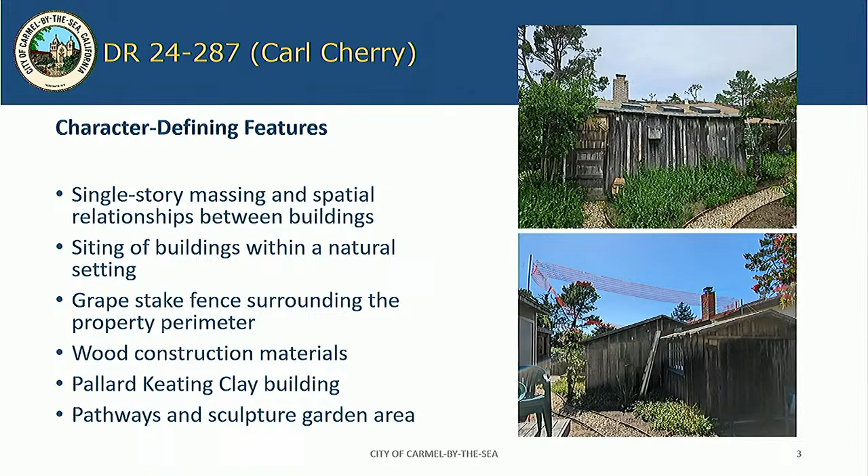The proposed project involves demolishing an existing 360 square foot studio, which is located just 1 foot from the northern property line. As I mentioned, we think this was a garage originally that was later added onto. The applicant is proposing to build a 775 square foot art studio in approximately the same location, but set 3 feet off that north property line to meet our current setbacks.

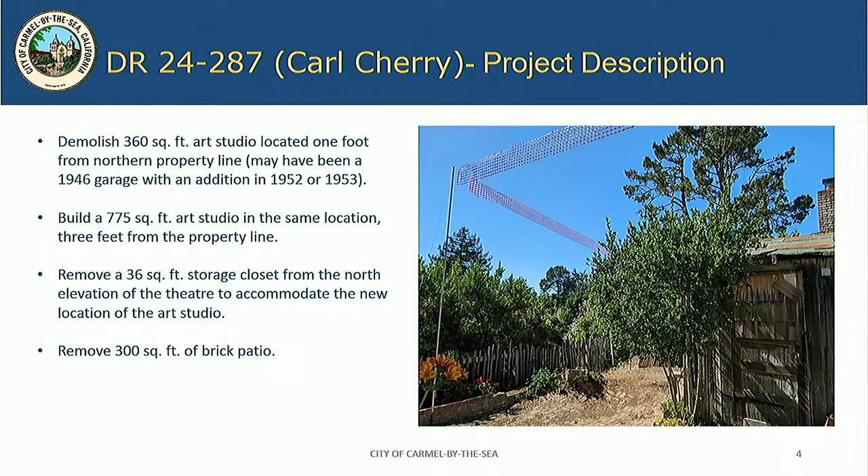In order to accommodate this new studio, the applicant will need to remove a 36 square foot storage closet from the theater building, and they're also going to need to demolish a 300 square foot brick patio. It's quite a large property, 20,000 square feet, and the applicant does have the floor area to do this project without exceeding the floor area limitations.

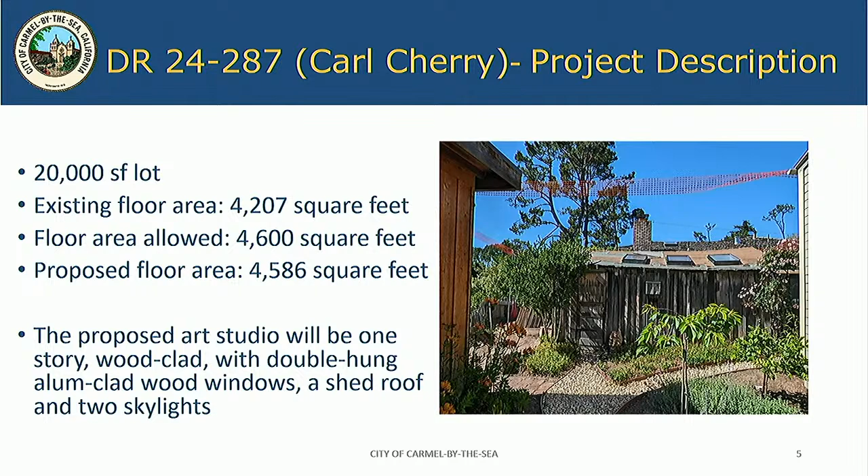They are proposing that the art studio is going to be 1 story, wood clad, with double hung aluminum clad wood windows, a shed roof, and 2 skylights. So we're here tonight to consider whether or not the project is consistent with the Secretary's standards for rehabilitation.

Here are the 10 standards listed on the left, and we did have the city's architectural historian review the project, and it is consistent as designed with no special conditions of approval with standards 1, 2, 4, 5, 9, and 10. Standards 3, 6, 7, and 8 were found not applicable.

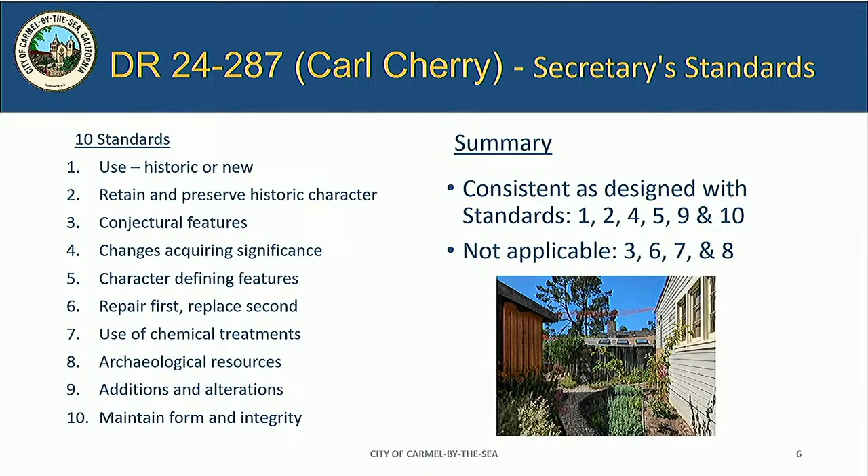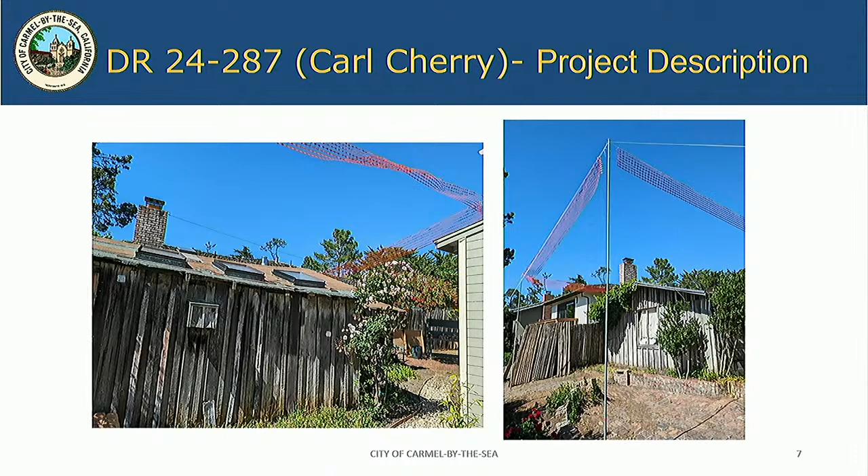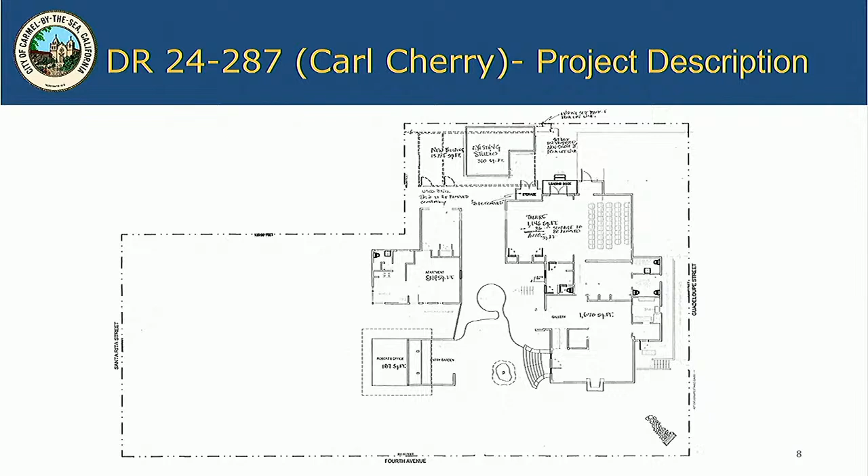Here are a few more pictures of the existing studio to be demolished and the story poles showing the outline of the new building. Here is a site plan, and I can zoom in on the project area at the north portion of the site. But here you can see the complex of buildings that have developed over the decades. Outlined in red is the existing studio proposed to be demolished, and the new building outlined in green.

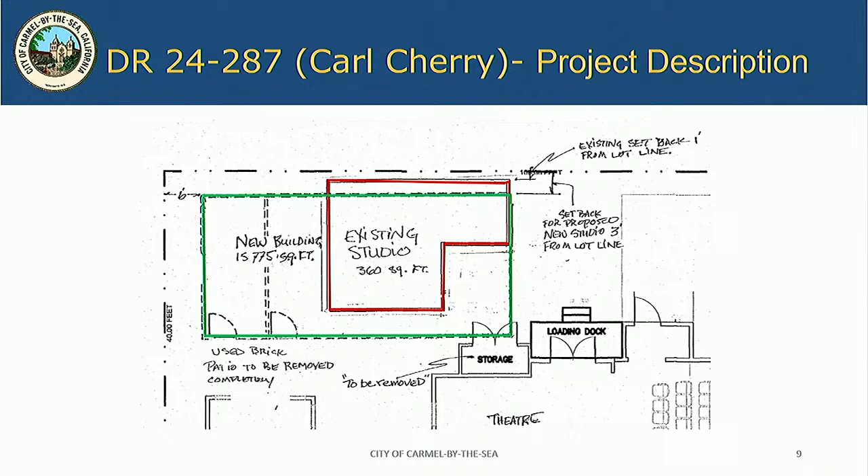Again, the new building will be 775 square feet. You can also see the storage closet on the theater, and why that area will need to be demolished to accommodate the new building.

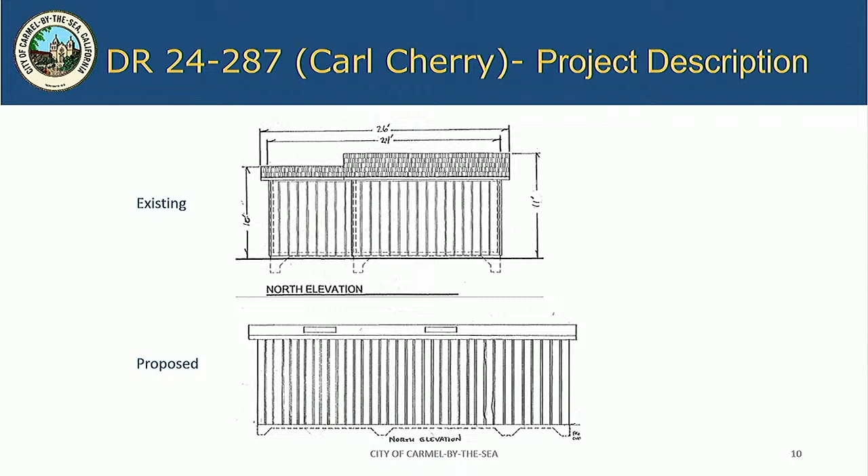I can go through the elevations. Existing is on top, proposed on the bottom. Here's the north elevation with no openings.

The shed roof will be sloped down towards the north, so you can see the 2 skylights.

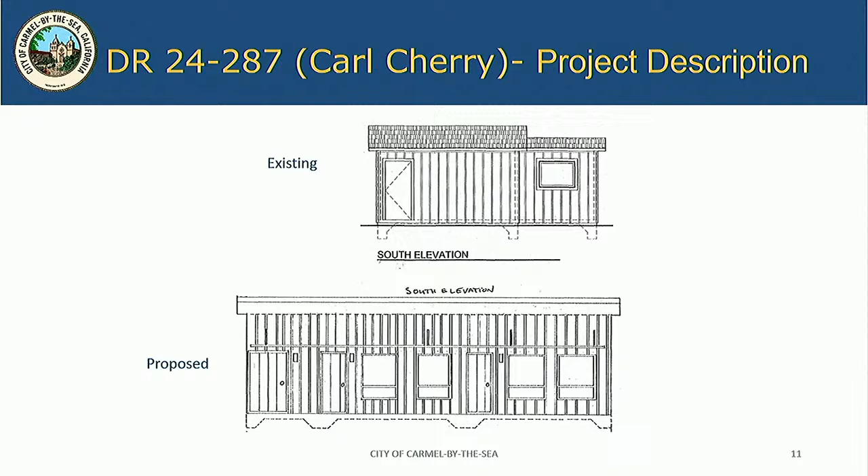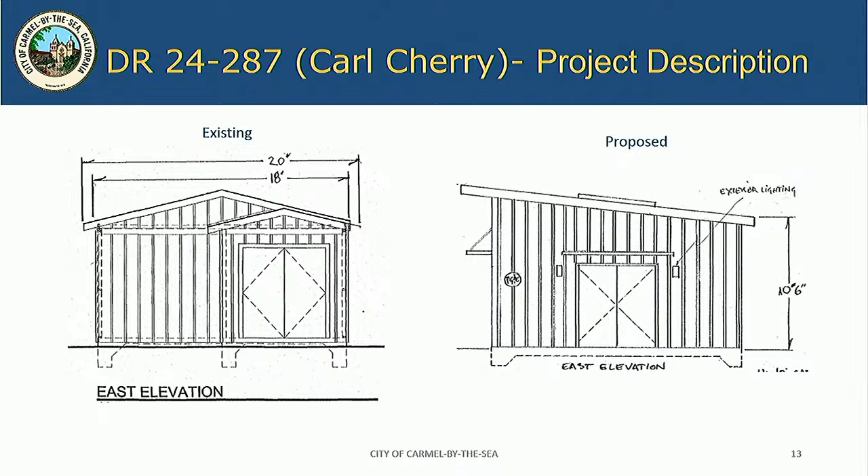Just as a reminder, the HRB is considering issuing a determination of consistency with the standards, but the project is reviewed via a planning study by planning staff after this hearing. So the staff recommendation is to issue a determination of consistency for the project as designed and proposed, with no special conditions. I'm happy to answer any questions, and we also have the applicant here this evening.

Are there any initial questions from the board? Okay, if not, we'll open it up to the public. Can we hear from the applicant or the applicant's representative?

I'm the applicant, my name's Robert Walker. You're welcome to come up to the mic. Thank you — my name is, I go by Bob Walker.

I'm a member of the board of directors for Carl Cherry Center, and I'm chair of the grounds and building for this new structure. I designed the building and did the plans and submitted them to Catherine.

I'm not an architect, so I don't have a degree in that. I think it's my 11th grade drafting class that came into play on making those drawings. We're trying to keep the structure in compliance with the look of the 2 buildings — the apartment, which is currently the apartment, and then the Carl Cherry Foundation office.

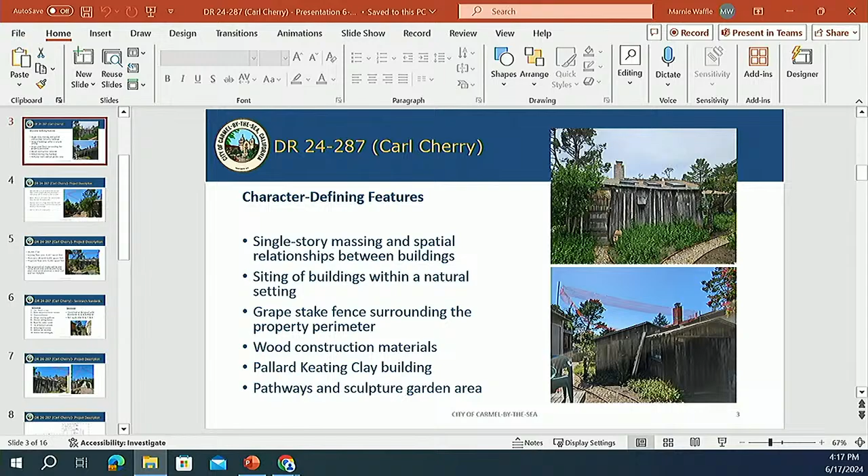Bob, can you clarify the height of the building between the high side and the low side? It's 3 feet difference. The low side roof would be 10 feet, and the high side would be 13. Is the low side about the same height as the existing building? Well, it's a different type of pitched roof, so the low side would be approximately the same as... I think the lowest portion of the existing roof would be lower than the new lowest portion of the new building, if that's helpful.

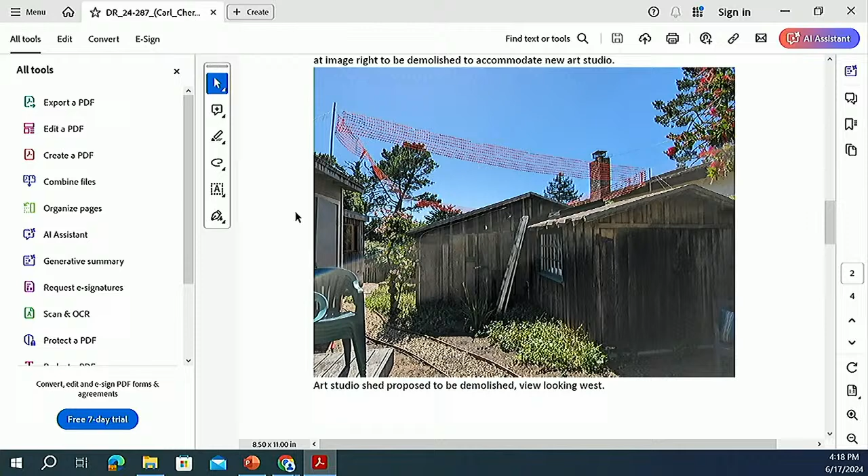Here you can kind of see. If you look out your window and look at the orange plastic fencing, that will show you the height of that roof on your side of the building. Oh, on my side? Yes, correct. And then the highest fencing you'll see is on the far side from your home.

Debbie, are you able to see the photo on the screen right now? Not very well, actually. I'm looking at it on my phone because I'm in the car.

Okay, I'll have to look at it in person. But there's no windows on that building side, right? It's going to be taller along that north property line, coming down to the south, so there'll be more distance between you and the building.

Okay, well, we are really happy to have the Cherry Center next to us, so I'm guessing it'll be okay.

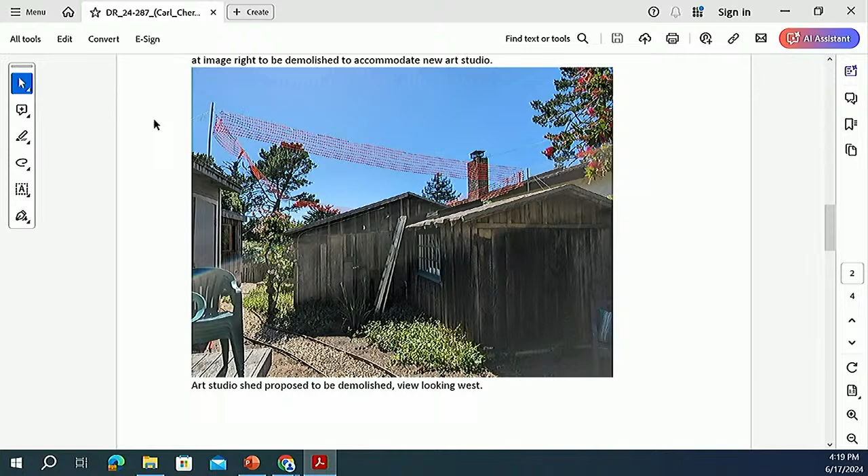Can I just make a clarification? Let staff correct me, but our purview is not really dealing with whether a building blocks a neighbor's view or light into the neighbor's yard. It's really about consistency with the Secretary of Interior standards.

Thank you, planning, Eric. It will be dealt with. This will go to the planning commission, which will address that. Is it a track one? Because they're not adding more than 10% of the existing floor area. However, as I mentioned, the HRB is not approving the project tonight.

You're just considering consistency with the Secretary standards, so staff will issue an approval, and there will be a 10-day public appeal period. And then it will go to the planning commission? No, this is a track one project because they're not increasing the floor area on the property above 10%, and 10% is our threshold.

Okay, any other questions for the applicant? All right, we'll close the floor. Thank you so much, appreciate it. We'll close the floor back to the board. Any comments that the board would like to make?

I had a question for maybe Eric as our architect, or maybe staff. I noticed in the historic consultant's report, Ms. Clovis states that the board and batten siding will be reused to the extent possible, and any new siding would be compatible. I remember in past years there was a principle of not reusing some of this material. Am I incorrect on that?

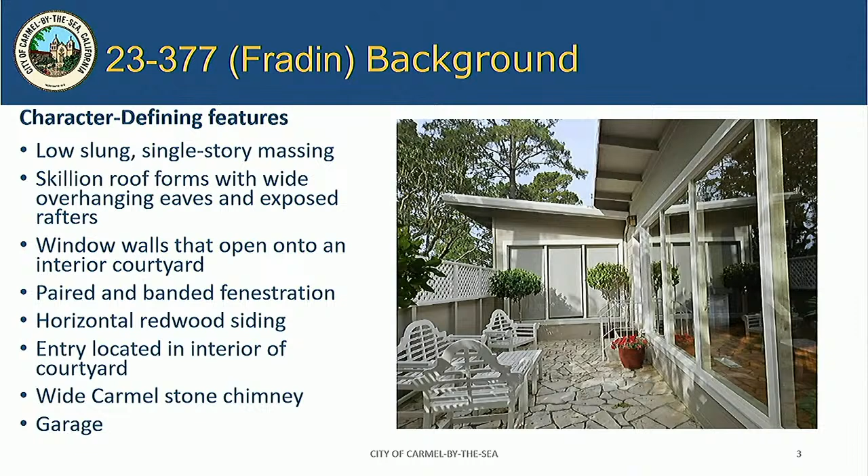The character-defining features of the property include the low-slung single-story massing, a skillion roof form—an exaggerated shed roof form with wide overhanging eaves and exposed rafters—window walls that open onto the interior courtyard, paired and banded fenestration, horizontal redwood siding, the entry located in this courtyard, a wide Carmel stone chimney, and the detached garage.

The proposed project simply involves replacing a laundry closet with a 76 square foot bathroom with a skylight located in the rear portion of the interior side yard, 3 feet 8 inches from the north property line. They will also demolish the existing retaining wall in this area and construct a new retaining wall just a bit further north to accommodate the addition.

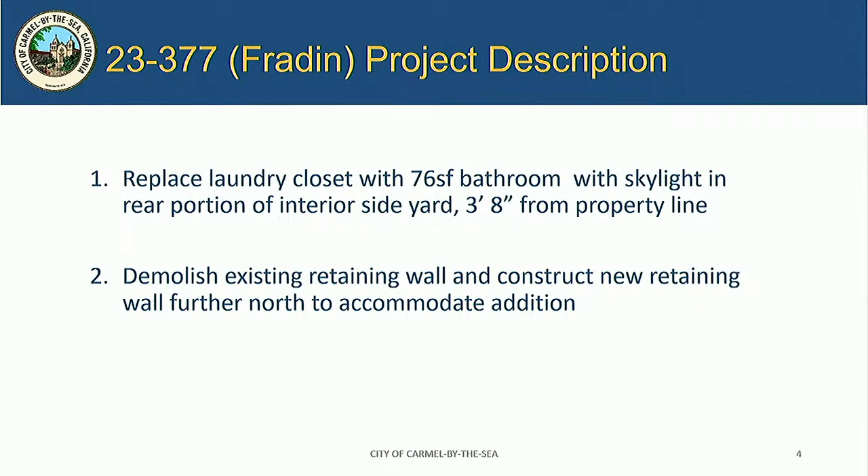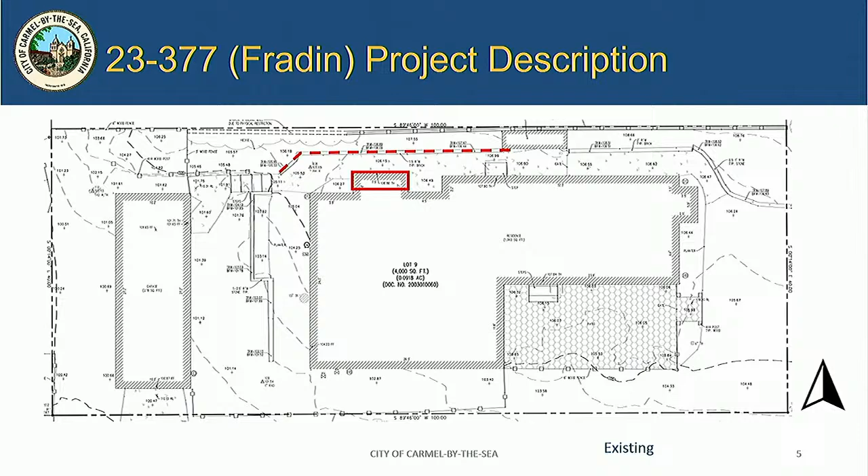The laundry closet they're proposing to demolish is not an original feature of the home. Here outlined in red, you can see the laundry closet and the portion of retaining wall they're proposing to move north. And here is the proposed addition, the new bathroom and the new retaining wall. There are no other project components.

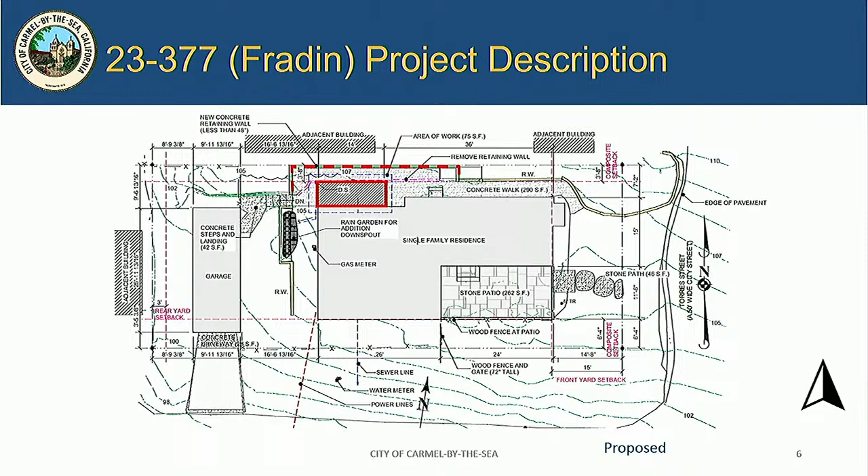Here are the relevant elevations that will be changing. On the left, we have the west elevation. You can see there that the new addition juts out to the north and will be differentiated from the 9-inch wide horizontal boards of the house. So the addition is going to feature 4.5 width boards.

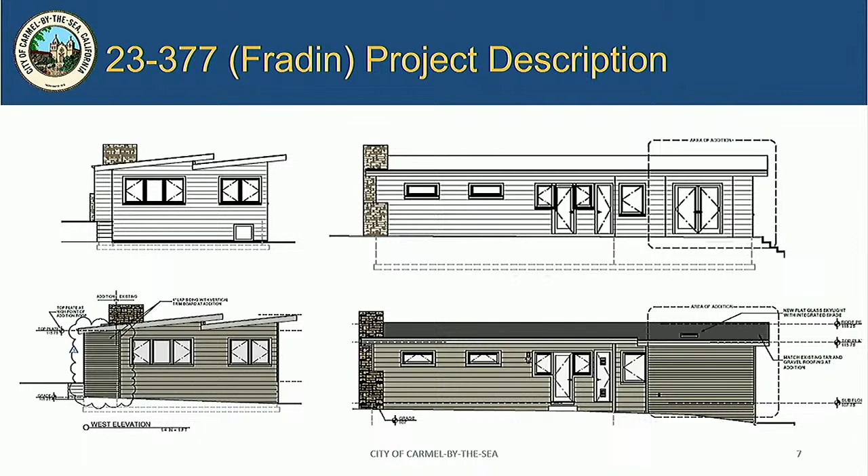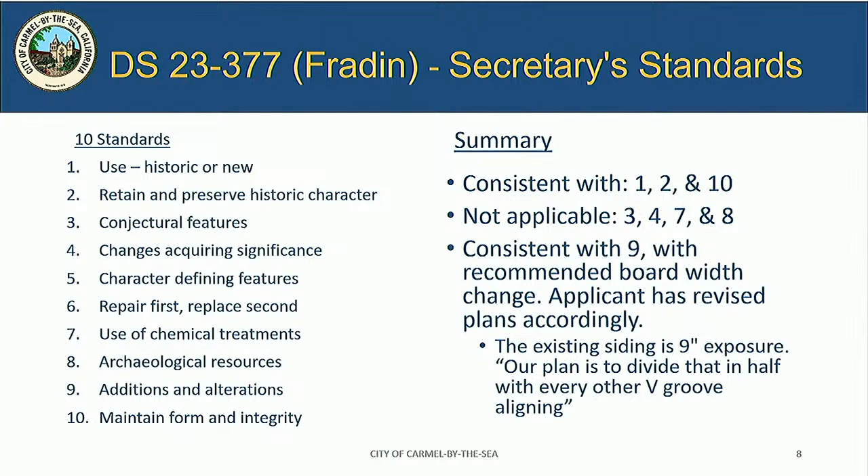Here are our 10 standards again, and when the city's historic consultant reviewed this project, she found it consistent with standards 1, 2, and 10. Standards 3, 4, 7, and 8 were found not applicable to this project, and then it was found to be consistent with standard 9 if the applicant revised the plans to differentiate the addition so that it wasn't matching, and the applicant did indeed revise the plans. So now it's going to be a 4.5 width board instead of 9-inch, and the plan is to divide that 9 inches in half with every other V-groove aligning. Here you can kind of see that.

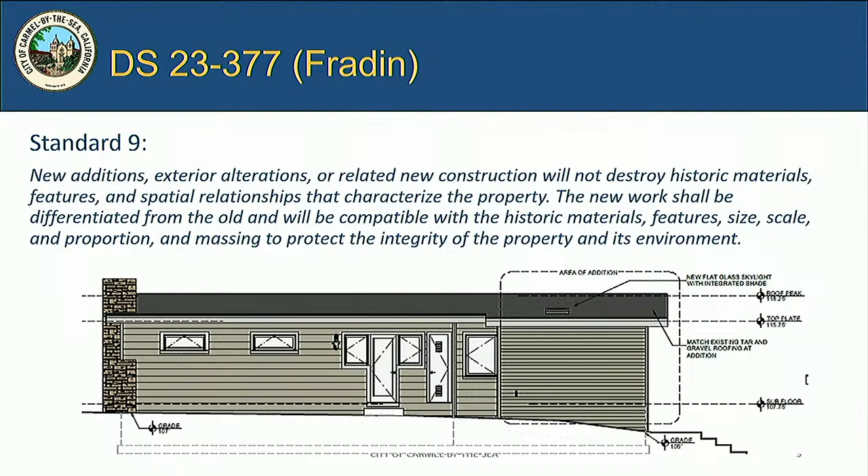So with this incorporated recommendation, staff does recommend finding the project consistent with the standards. As I mentioned before, here you're considering a determination of consistency with the standards, not approving the project itself—staff will do that. But we do recommend that you find the project consistent with the standards. Happy to answer questions. We also have the architect and the homeowner with us tonight.

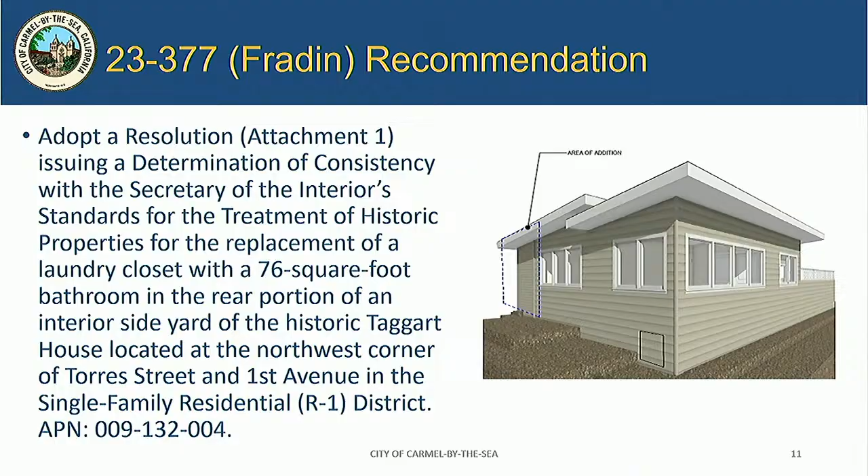Okay, thank you very much. Does the board have any initial questions for the staff? No? Okay, if not, we'll open it up for public. Do the owners or the owner's representative have any comments for the board? If so, please come up.

Welcome. Hello, staff and board members. Thank you for your service. My name is Alan Lehman, and I'm the designer on the project. When we started the project, the house had not been deemed historic, but we did recognize the value of the beauty of this mid-century design, and so we tried to design a very subtle and sedate, somewhat hidden, transparent addition to the house. With the homeowners' guidance on the project, I think we succeeded in making something almost disappear. So that was our goal, and hopefully you agree. Are there any questions you have for me?

Thank you very much. Thank you. Are there any comments from the public on this project?

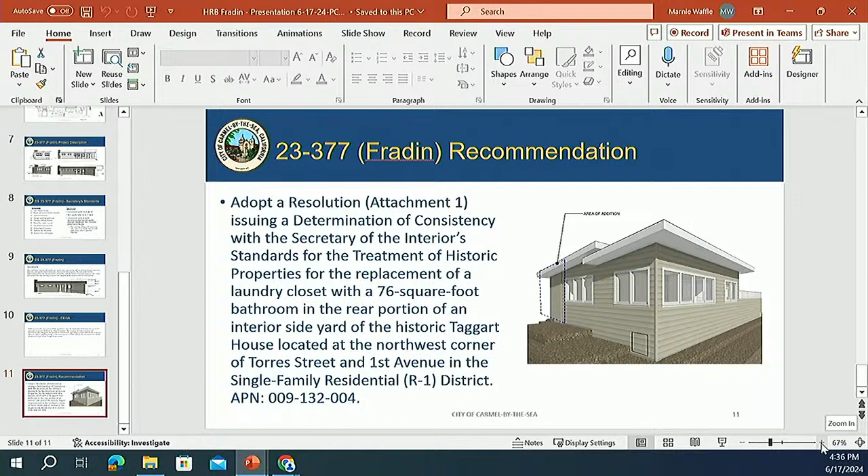Yeah, I mean, and then it flushes out, and then you see the difference. I do appreciate the fact that your idea about the siding having the overall exposure, so that they at least line up. But yeah, I think it needs to be jogged.

How much? I mean, 6 inches. Could you take 6 inches off the bathroom? Well, no, we could, but we would be reducing our vanity to 30 inches, and it becomes very difficult to use as a second bathroom, to not have any counter space. So if you don't want to take out the window, it could be the existing window, and the bath could be shifted over slightly.

Okay, but all our preferences aside, we don't want to alter the house, so we don't want them to adjust the roof. You are adjusting the roof though. But with this proposal, all our preferences aside, they are meeting the intent by changing the 9-inch boards to 4.5-inch boards. So they're meeting the Secretary of Interior standards by doing that. And so we can make suggestions, but they are hitting the intent at this time, and so I think...

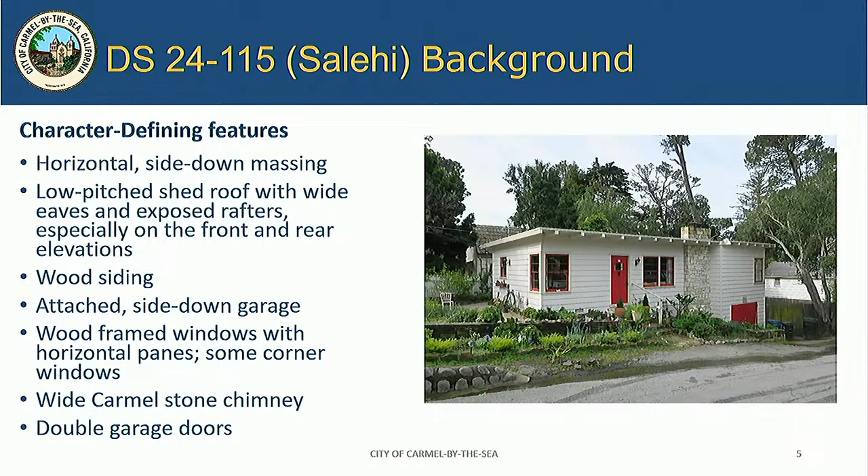The proposed project involves a 78 square foot bathroom and laundry addition and an 18 square foot addition to the kitchen, both fronting that south patio. The applicant also proposes to enlarge the existing garage door opening and convert the existing double garage door into a single roll-up door. They're also proposing to add 4 new wood steps to the existing flight of steps along the south elevation, a new driveway with permeable pavers, and a 558 square foot ADU with a roof deck.

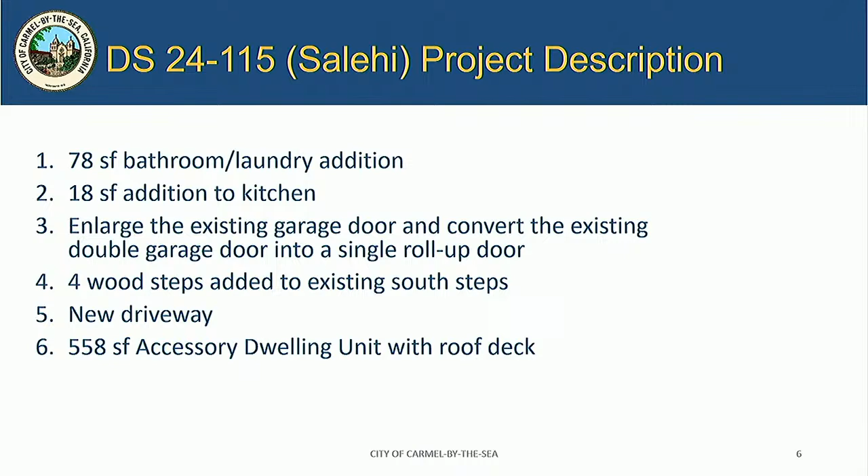These will be visible, at least the larger addition will be visible from Santa Rita, but it is definitely a secondary elevation.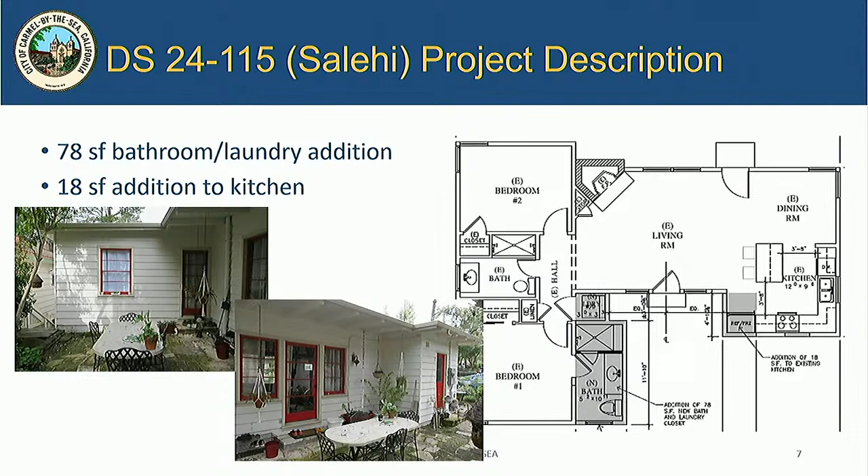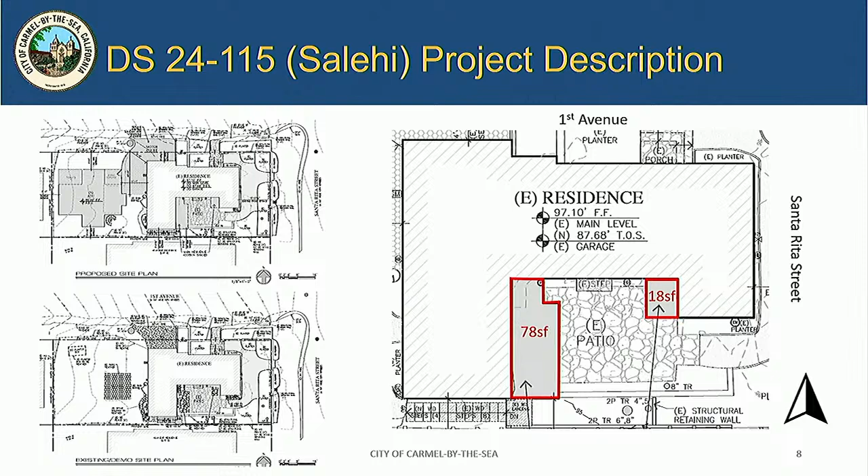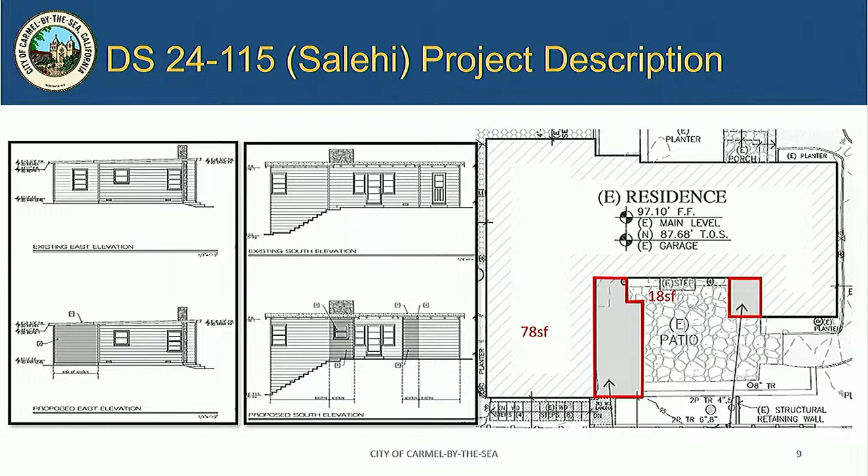The next project component is enlarging the existing garage door opening, and converting the existing double garage door into a single roll-up door.

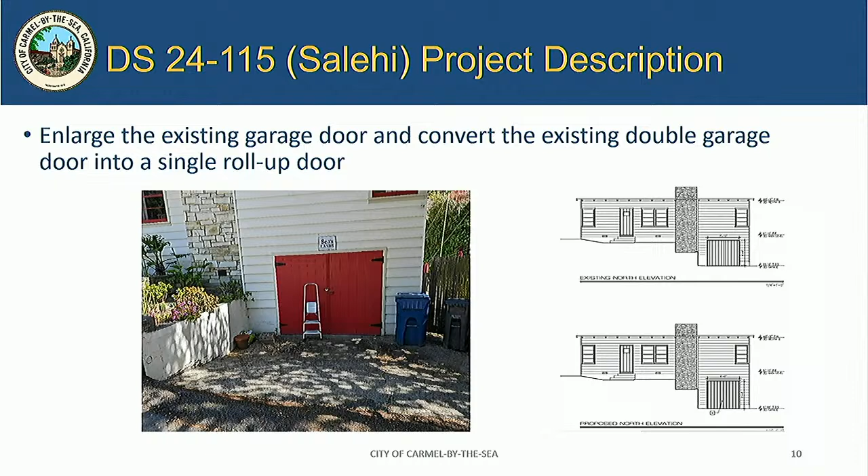Here you can see how the dimensions are proposed to be changed. Currently the garage opening is 7 feet 10 inches wide, proposed to go up. The idea is to better accommodate the size of a modern car. The width is proposed to go from 7'10" to 8 feet, and the height is proposed to go from 6 feet 4 inches up to 7 feet.

And in the plans included in your packet, the appearance of the garage door is proposed to stay the same.

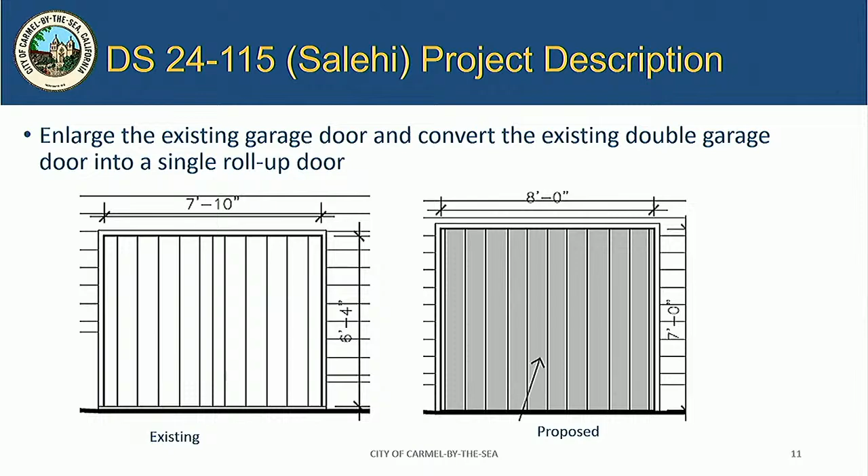They're also proposing to replace the asphalt driveway with a new permeable paver driveway, and add 4 steps to the existing flight of steps along the south elevation.

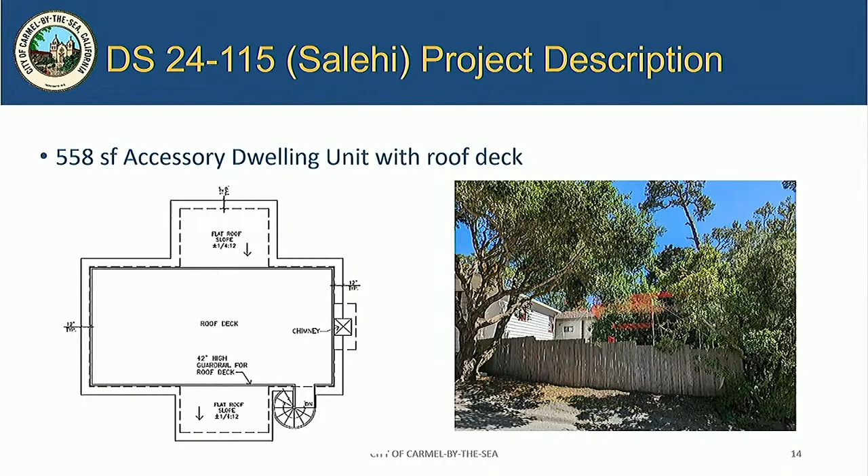The ADU itself was included in the Phase 2 historic assessment in your packet. The city's historian did find it to comply with the Secretary's standards, which is necessary for new ADUs. However, beyond that, ADUs are not subject to discretionary review by the HRB or by staff, simply whether it complies, and that's a yes/no objective decision.

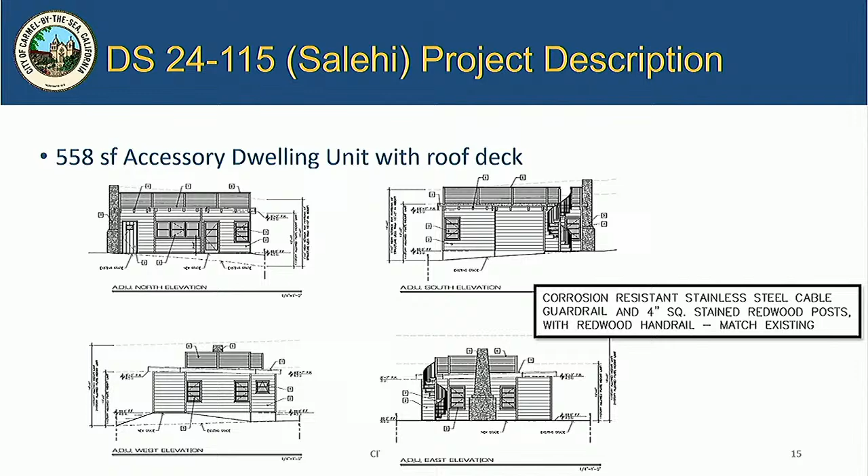However, a roof deck is not part of the ADU per se, so the design of the roof deck is something we could discuss. The applicant has proposed a stainless steel cable guardrail with redwood posts and a redwood handrail, and the city's historic consultant did find that to be consistent with the standards.

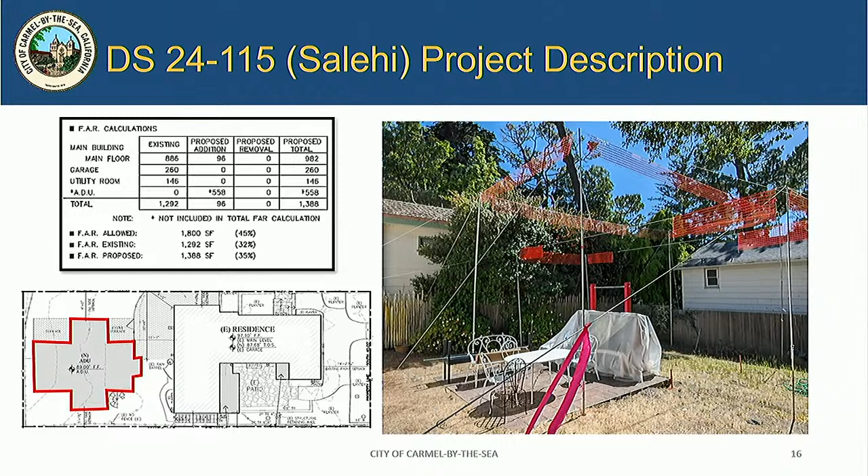In the floor area table in the project plans, you'll notice that the ADU is not included in the totals. However, even with the additions proposed to the main house, the project is well under the allowed floor area. It will remain a single-story dwelling.

So the consultant and staff have found this project consistent with standards 1, 2, 5, and 10, and 3, 4, 7, and 8 are not applicable to this project. Standards 6 and 9 we found the project largely consistent, however for the proposed changes to the garage door, the architect is here to provide more information. We feel the consultant felt it could be found consistent with standards 6 and 9.

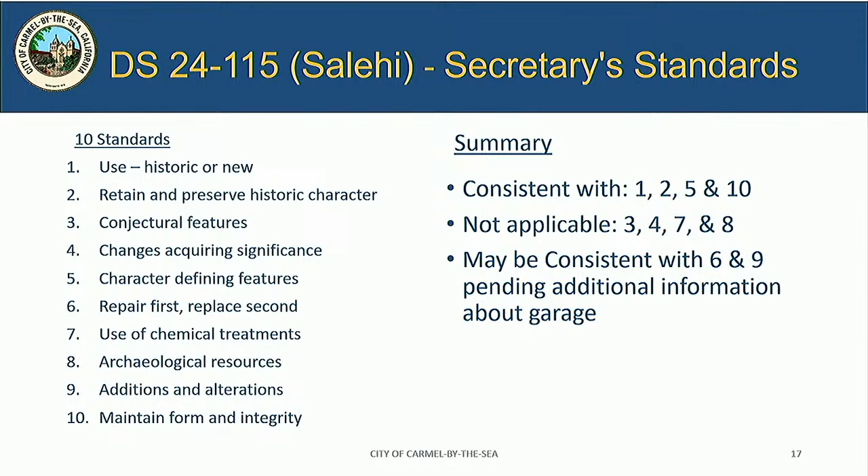Standards 6 and 9 specifically discuss repair rather than replacement, always as a first course of action. Standard 9 discusses that where you need to make changes, they should be differentiated and compatible. So again, we're really only looking at the garage component of the project.

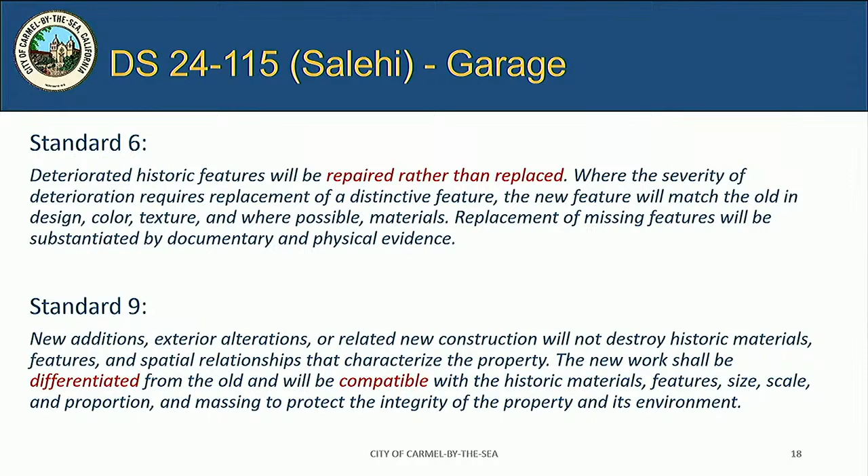As mentioned, the opening is proposed to be enlarged, and the doors themselves, the carriage doors, are proposed to be retained but converted into a roll-up configuration. Retaining any historic material is always the preferred course, and this applies to garage doors as well. The architect can speak to exactly how he's going to accomplish this proposal.

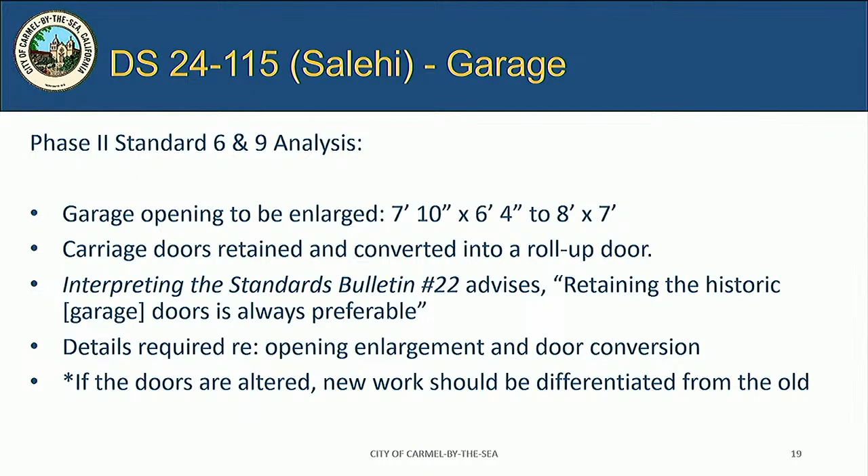The consultant did write in her Phase 2 report that if they are to be altered, the new work should be differentiated from the old. The staff analysis is conservative because they are a character-defining feature. Staff recommends retaining the size of the garage door opening and the existing garage doors.

So that's been added as a draft condition of approval. Here are the options: you may approve the garage changes if the new work is sufficiently differentiated, you may accept the current draft condition to retain the opening size and the doors, or you could revise it or add additional conditions, or continue the project if more detail about the garage is necessary.

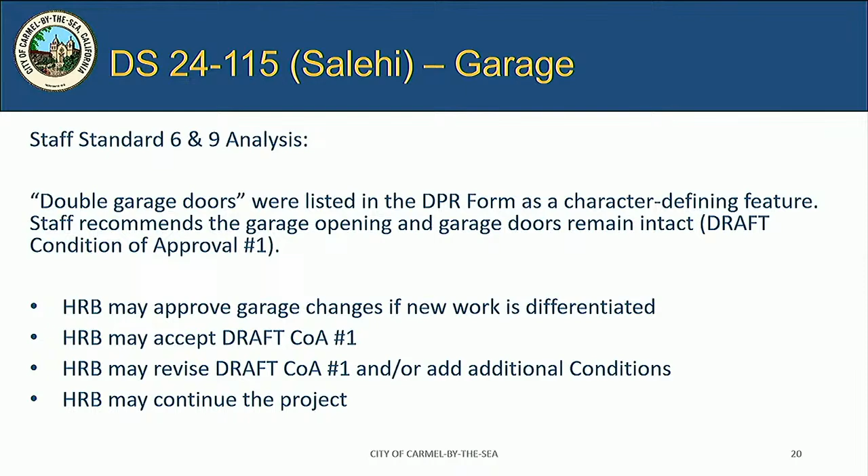And here is the staff recommendation. This is just a reminder that you're not approving the project tonight, simply considering consistency with the standards.

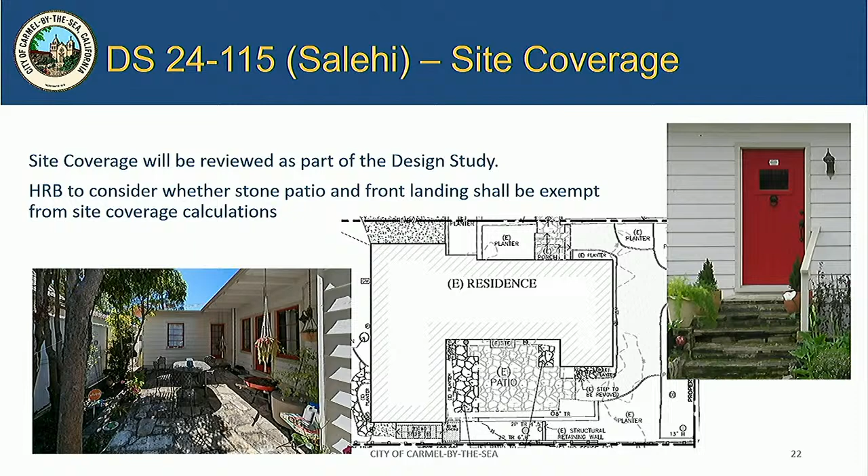Oh, one last slide. As you noticed on the site tour, there's a Carmel stone patio and a Carmel stone front landing. As I just mentioned, staff will be processing the design study, and part of that is looking at site coverage. The HRB, as you have in the past, determined certain site coverage elements to be historic and exempt if you would like to see them stay. So staff is asking the board to weigh in on whether that Carmel stone patio and the front landing may be considered exempt from site coverage.

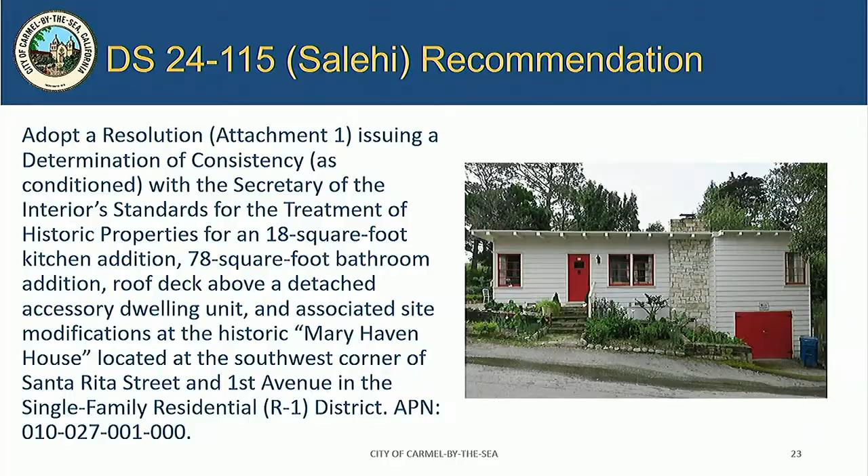That concludes my presentation. Staff recommends issuing a determination of consistency, but I'm here to answer questions, and we also have the architect with us.

Okay, thank you. Does the board have any initial questions for the staff?

The contractor who did this in 1941 is not in the historic context statement. He doesn't have to be. We found the building to be significant for the style and not for the builder. He was a professional ice skater, interestingly, who then built this home.

Can I get a clarification on the ADU issues with the historic property? So what you're saying, they're showing the drawings for the ADU, and that's basically for us to determine the consistency of the ADU with the Secretary's Standards. Is that correct? Yeah, we can do that, but we can't use it as an objective standard beyond that. You couldn't go the next step and say we'd like it painted brown and not white, or change the board width, or move this thing from the corner by 6 inches. Exactly. So it simply needs to comply with the city's local coastal program, in that it meets the standards and doesn't harm the resource.

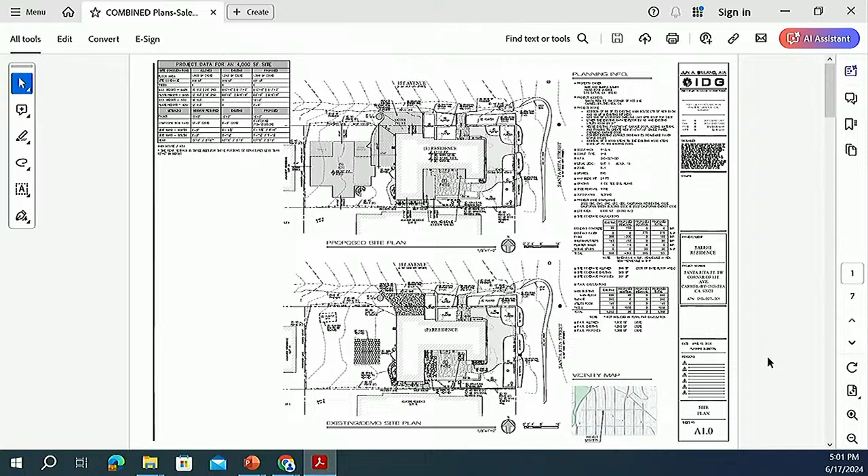Okay, so the first image is the site plan. On the bottom is the existing site plan, and the top is the addition. On the left side of the courtyard, shaded, will be the bathroom addition, and to the right of that will be the kitchen addition. I'm showing that because I think whoever designed this thought the courtyard or patio was integral to the design, so our intent is to keep that patio there and just have enough addition to accommodate the owner's needs.

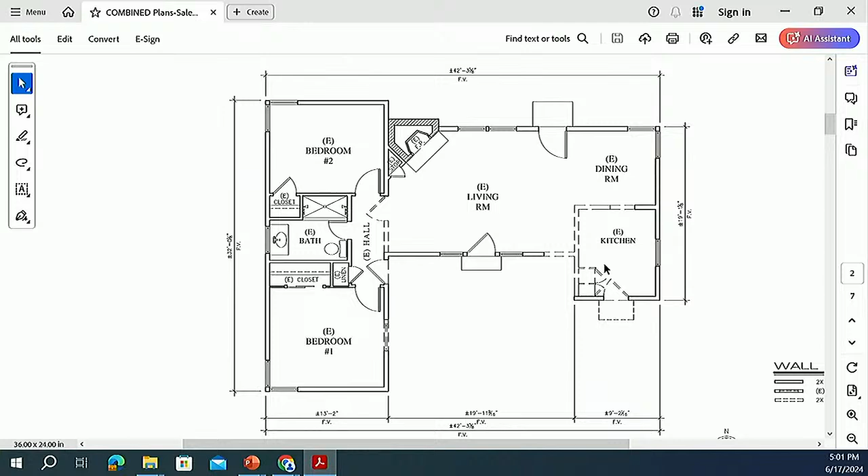Next image, please, Catherine. Okay, this is the existing floor plan. Currently the house has one bathroom shared by the two bedrooms, and the kitchen is so small that it doesn't function well for the owner. So our proposed project will allow for a second en-suite bathroom, a small stacked washer-dryer area, and a kitchen addition which will sit under the existing eave line and roof line—so we're not adding roofing there, it's just that. And at the bottom, you'll see that we're reusing where the bathroom is; there's a window there that's relocating, existing, being removed from the east side of bedroom 1.

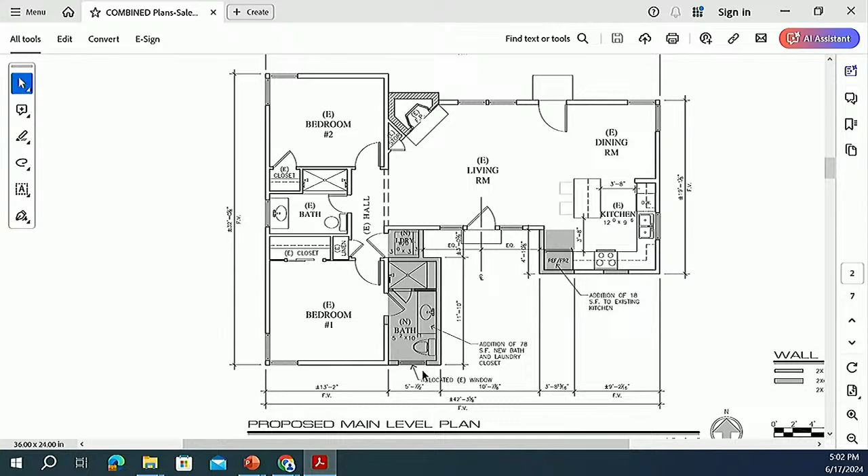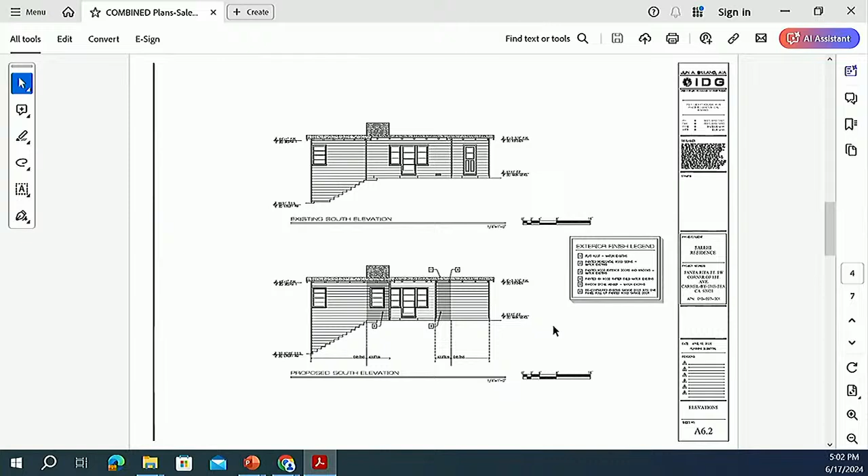Okay. The garage on top is the existing garage. The feature of the garage is just vertical siding with decorative hinges and an astragal in the middle. Our proposal has a size of 7'10" by 6'4".

So our proposal is to change it into a tilt-up, with a tilt-up garage door. We'll show you in the next image. So our idea is a tilt-up, and you can see the section profile.

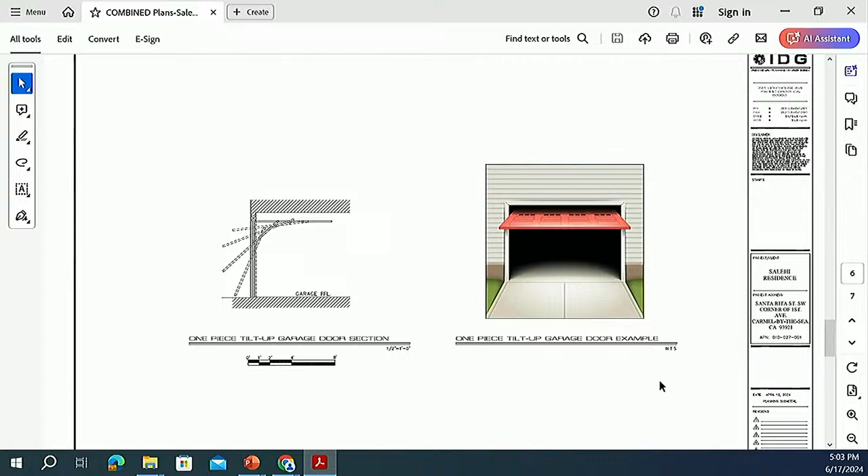Our intent is to encase the existing garage door with 2x4 material, so we keep the integrity of the existing garage door. We're widening it so the owner can park their SUV, because right now it's very tight. We're keeping the hinge, allocating it to the perimeter, and keeping the center astragal fixed in place. So when it's all closed, it looks the same, except for that feature where we have a perimeter band around the garage door.

Can I go back with that image, Catherine? One more back, please. Okay. I don't know if you can see that garage door at the bottom of the existing garage door. I mean, you were there today, I don't know if you noticed, it's all rotted. So either we repair or replace it, but it's rotted. They can't even use it. It's an existing carriage door, but it's not functional right now. Next, please.

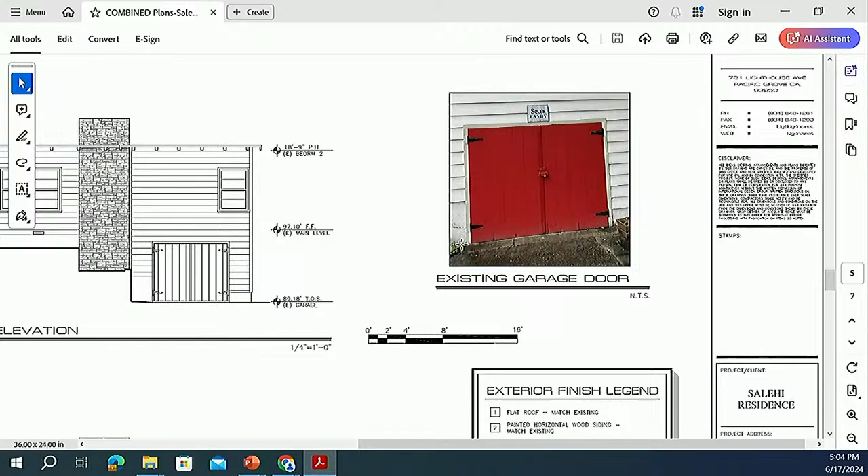That concludes my presentation. I'm here to answer any questions you might have. Thank you so much. Thank you.

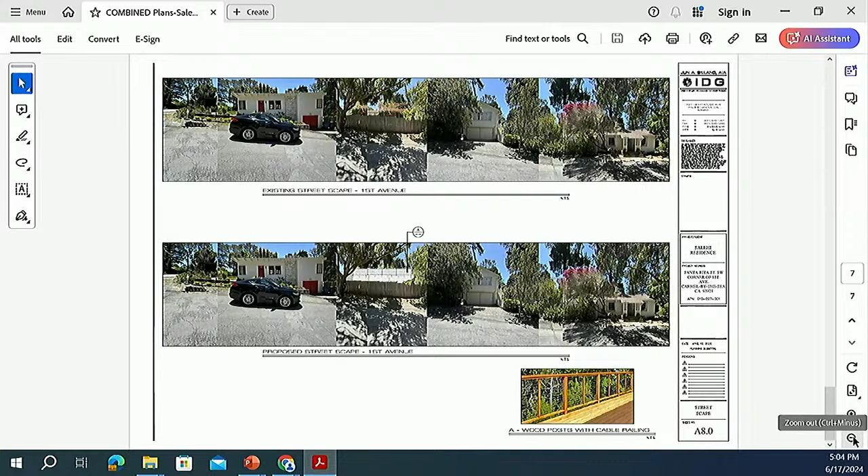Do board members have questions? I just had one. How is the state of the garage door itself? You said there was dry rot at the bottom around the perimeter of the garage door. Is the door itself... the bottom is the part that's rotted. Most of it is in good shape.

The idea is, if it's worth saving sections of it, we just cut it because it's painted. You can easily mask it and keep most of the existing material intact. And framing it actually helps give it more strength, as we all know, when you frame something like that. It will not be flush with the siding, probably 1/4 inch to 3/8 inch protrusion, so you can create a shadow line and differentiate new and old.

Thank you. You don't see any damage to the patio, the original patio, when you do the additions? There are some pieces of stone that probably need to be re-mortared, but overall it's in good shape.

Will you leave it in place while you do the construction, or will you remove it and then replace it? Wherever we're taking it out, we'll probably put it downstairs where we have the steps, because there'll be a good chunk of it removed from the addition. So the intent is to keep it and reuse it on site. I see, thank you. Any other questions?

Okay, any questions from the public? No? We'll close it back up and bring it back to the board.